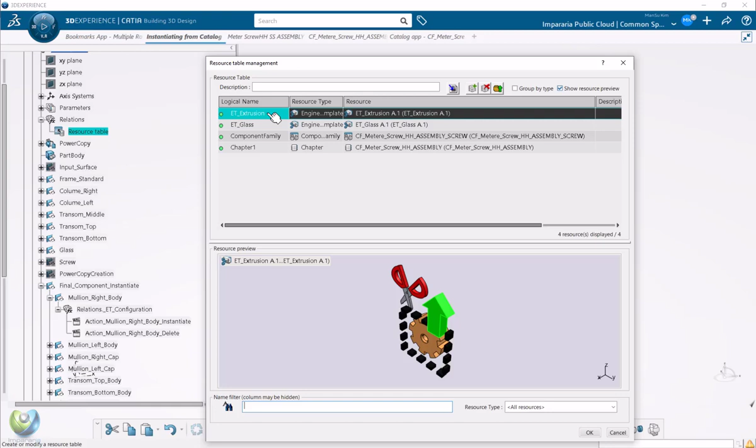Today's content is about instantiating from the catalog. In a previous session, I introduced instantiation of the final component using the engineering connection template, such as this engineering connection case. Let's look at it again. After you instantiate, the engineering template will be instantiated at the location with the engineering connection. When you look at the resource table, we use this engineering connection—in this case, engineering extrusions engineering template. That's how it works, and each time you're creating a new component.

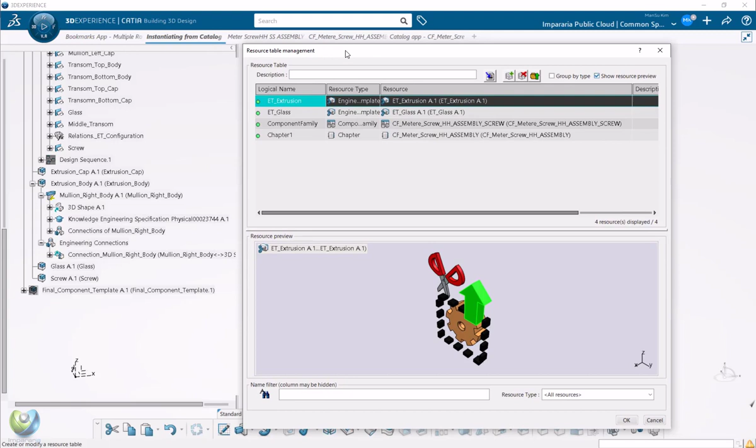But in today's case, we don't want to create a new component. We want to create the same component, such as a bolt and nut that's already in the library or chapter, and instantiate it as an instance, not a new reference. So I will introduce how it works.

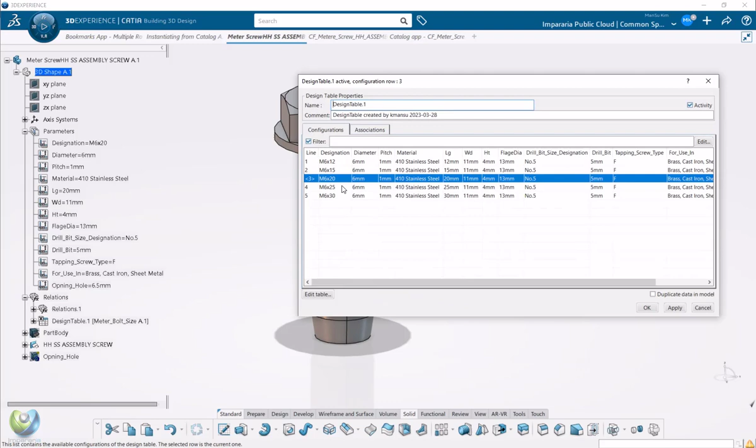Before creating the chapter, your content might be something like this component, and maybe you will have a design table. It's up to you, but in this case we have the design table so you can change such things—here I'm just making different lengths—but you can create your own design table with related parameter tables.

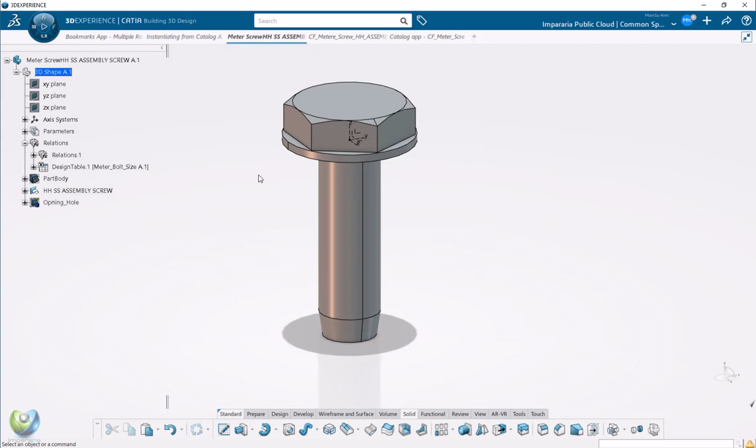After you create this component, we are going to create the component family. But before going to component family, you need to release it—it shouldn't be in work, it should be released. When you look at the property of the reference, the maturity here is released. Usually if you didn't do anything it stays in work, and you need to change it to release so you can generate the component family.

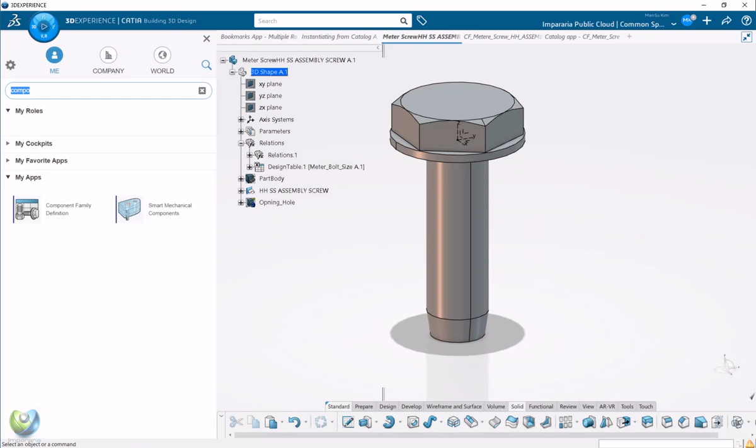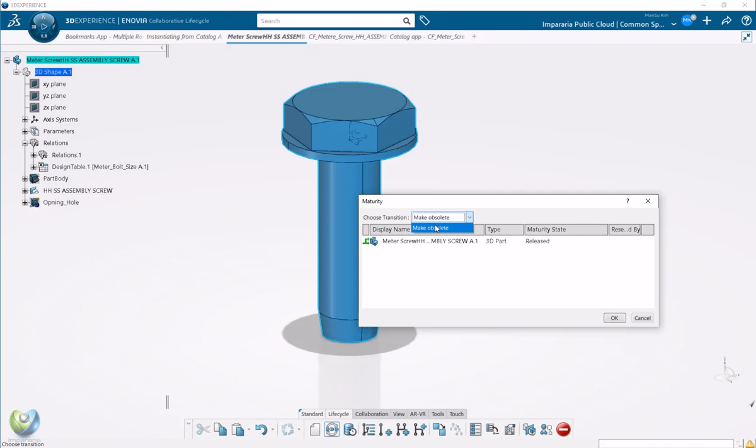So how to release: there's a collaborative life cycle, and here under maturity you can change the maturity. Once you release, you cannot come back, but let's proceed. I will not click OK yet—you can select here as release, and then go next. Then your property will be changed, and after that you can create the component.

Once you create the component family, in the component family you click here on test, and then it becomes green when everything tests successfully. This means it's all tested, it's green, no errors.

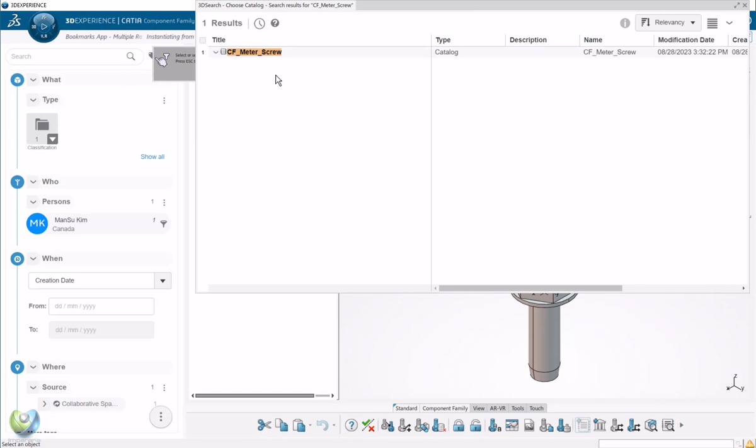Then you can create from here—creating the chapter. You can select the chapter catalog at the chapter, for example, you can select from the server, and then select the chapter. Then you will have some keywords that came from the design table, which is this—those become the keywords you need to select later.

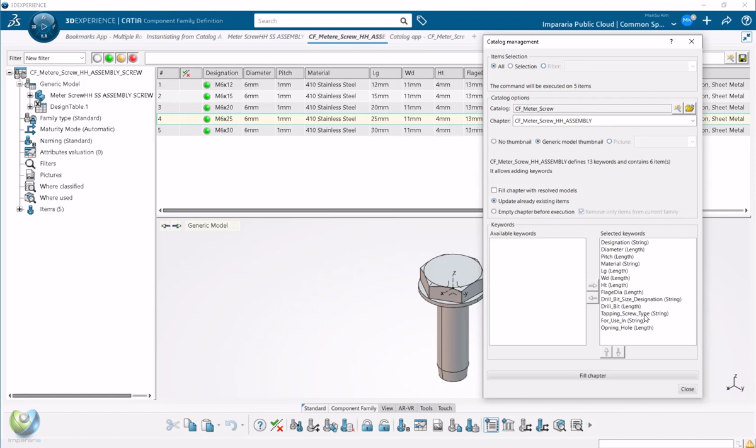When you click fill chapters, this becomes part of the chapter. When you look at the chapter, it becomes like that. The original master template component was put there before you created the component family. After that, you can put all the components created from the component family, storing them inside the chapter.

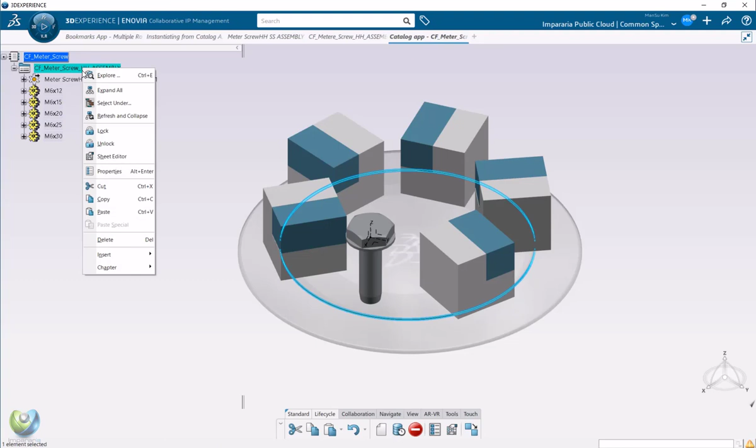When you look at the manage keyword options, you will see the parameters that originally came from the design tables. Then when you instantiate, you can use those attribute configurations by combining each attribute. In this use case, I just use the designations—all name is different and the length name is different—so I will just select within this one.

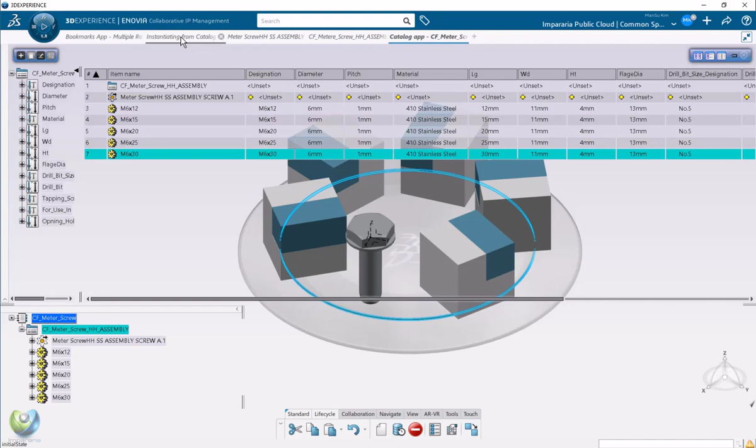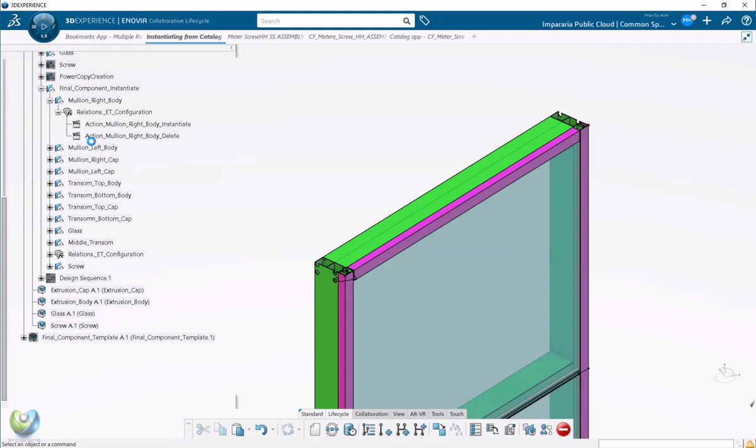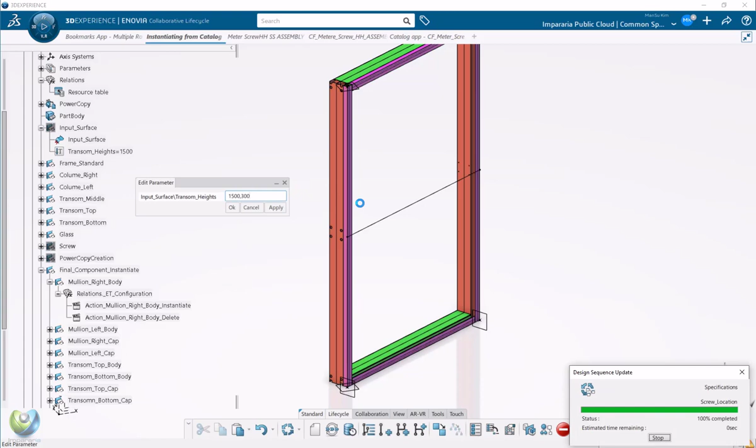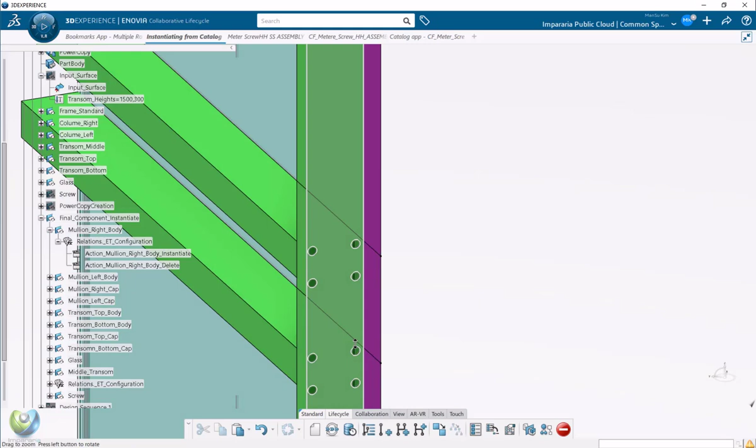Let's come back to the template modeling place. Secondly, since it's a screw, I will just remove this first again—remove the right body. So removed, and I hide the final component template. Now, we have some parameters, the middle transom location and the creations. Let's add one more, the middle transom, like this. Of course you need to cut down the result of the screw—in this case you're going to put the screw here, and to close the screw you need an additional hole, so additional management automations come with it.

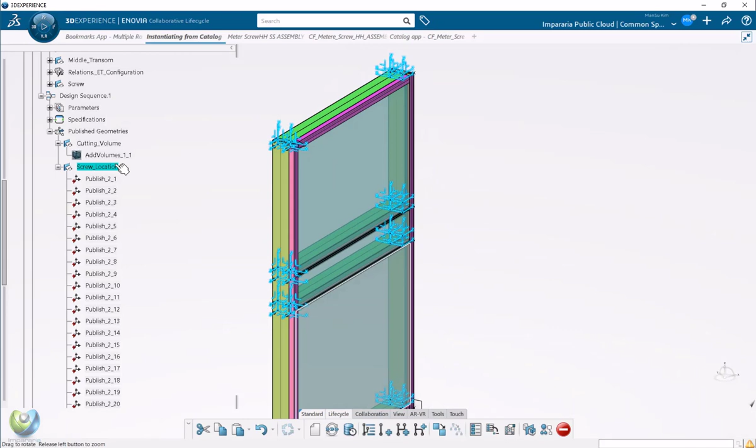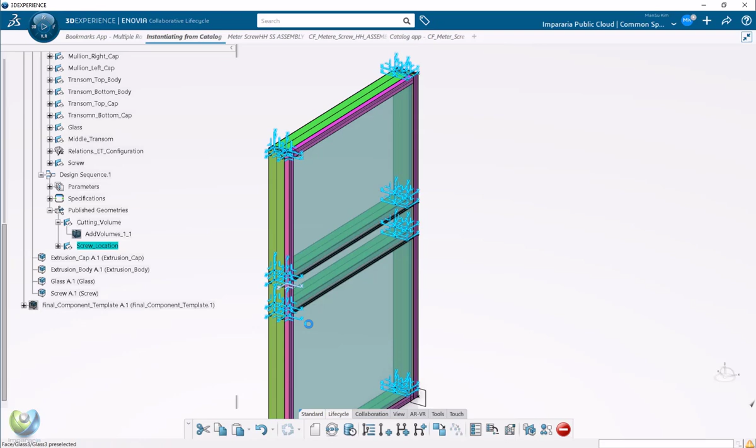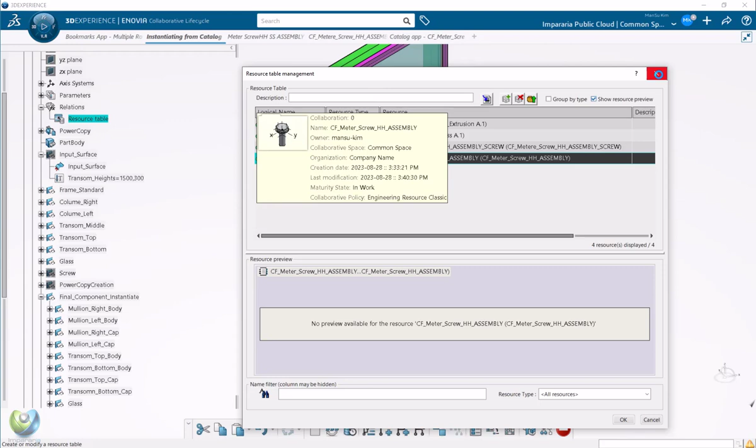The thing is, are we going to use this axis system? This axis system will also update whenever you change this parameter. This axis system will be used to create and instantiate your component in the right location. So you have locations, and you have the chapter here. We use this logical name, chapter, located in this chapter, and remember the keyword designations—that's how this script is created.

Let's try instantiating—the scripts are very similar, like here, middle transom, but instantiate not from the engineering template, but from the chapter. That means we don't use instantiate template, but instead use manage instance. Manage instance allows you to search from the chapter and get items from the chapter by the attribute of the keyword.

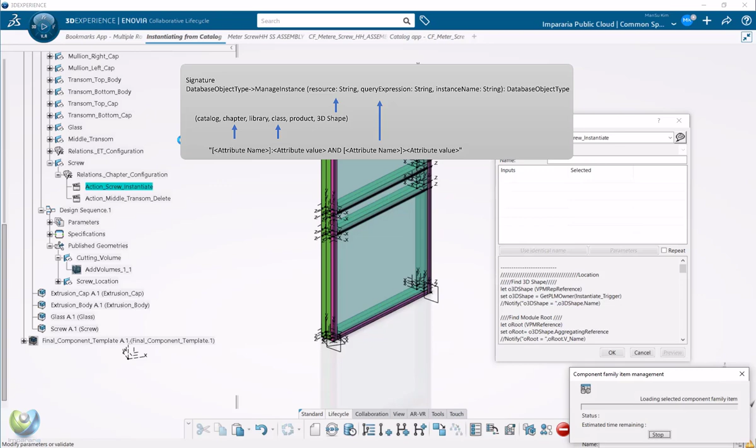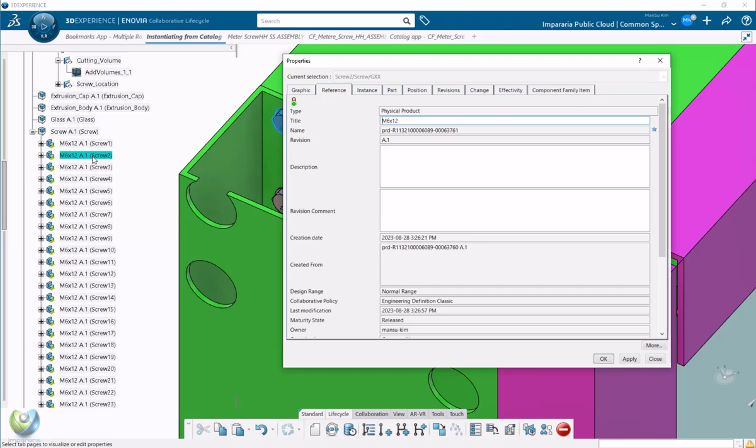Since it's all finished, all the components here are instantiated with the right location. And when you look at component 3761, all of them are actually the same reference but different instances in this assembly.

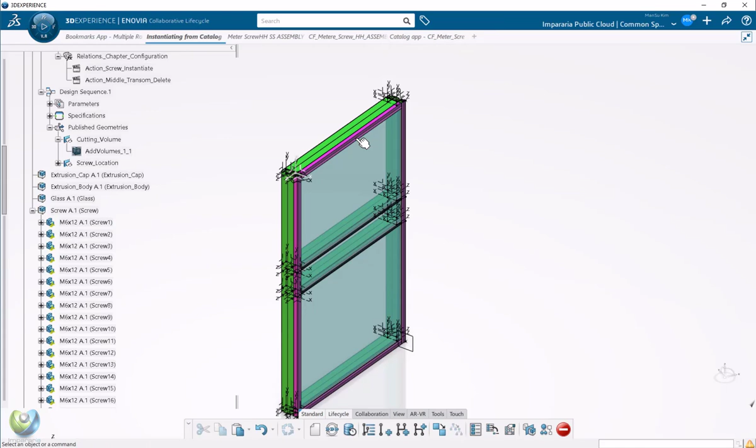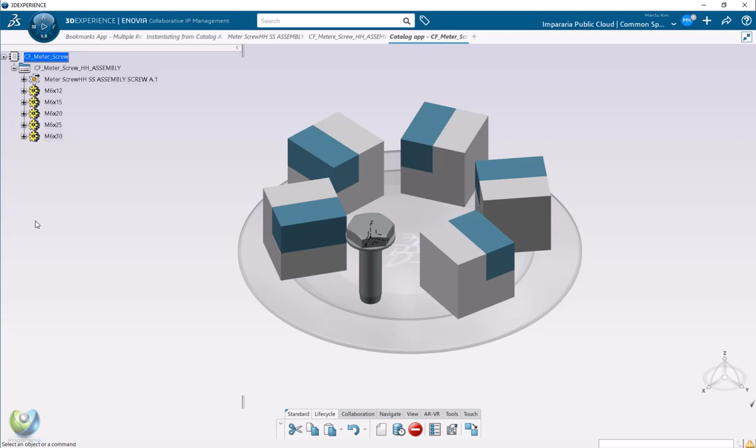I recommend you, if you have some reference you need to repeatedly use, you can put it in the chapter and manage it that way. The benefit of using chapters is that you can add more even later, even after finishing your template project. If you need to add more additional templates, you can put them there, and your automations will work without any modification.